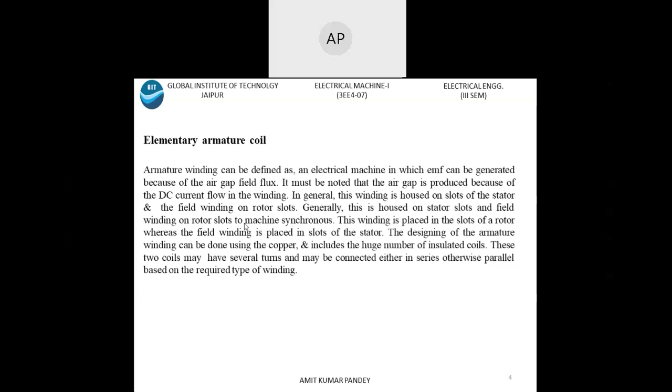Actually it is very important for commutation that armature conductors should be at the rotor, because if armature winding is not rotating, we are not able to find the working of the commutator, and it is the commutator which converts AC into DC. It is also known as mechanical rectifier, because we know rectifiers in electrical circuits convert AC into DC, and these commutators make AC into DC mechanically. That is the reason it is called a mechanical rectifier.

So for commutator, the commutator is pushed on the top of the shaft, as well as it is held on by a coarse knurl similar to the core. The designing of commutator can be done using copper bars, and an insulating material will separate the bars. Normally, this material is a thermoset plastic. However, in older armatures, sheet mica has been used.

The commutator has to be accurately associated with the core slots whenever pushed on the top of the shaft, because the wires from every coil will appear from the slots as well as attach with the commutator bars. To work the magnetic circuit efficiently, it is essential that the armature coil has a precise angular displacement from the commutator bar to which it is attached.

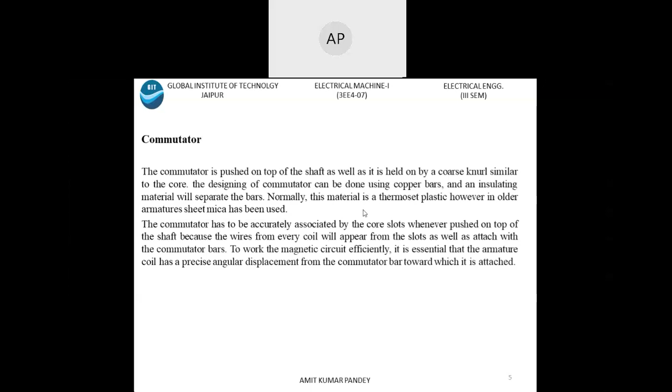So, in armature winding, there are two popular types of windings we use: lap winding and wave winding. In lap winding, the connection of the conductors is done in such a way that their parallel poles and lanes are similar. The last part of every armature coil can be connected to the nearby section on the commutator. The number of brushes in this winding can be similar to the number of parallel lanes, and these brushes are separated evenly into positive as well as negative polarity.

The applications of lap winding mainly include high current, low voltage machines. Lap windings are classified into two basic types: progressive and retrogressive. Here you can see from 1 it will start to another coil 2, and from 2 it will go to 3. So it is progressive.

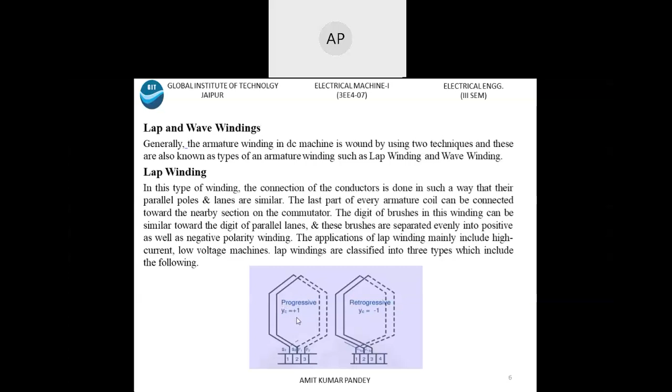From this side we can read, from 3 it starts flowing. Now from 3 it goes to 2, and from 2 it goes to 1. This is called retrogressive. And the commutation pitch is represented by YC. It is +1 in case of progressive, and it is -1 in case of retrogressive.

The three types of lap winding are simplex, duplex, and triplex. In simplex type lap winding, the ending of one coil is connected to the commutator section, and the beginning end of the secondary coil is arranged under a similar pole. Also, the number of parallel lanes is equal to the number of poles of the winding.

Next is the duplex type lap winding. In this type of winding, the number of parallel lanes among the poles is double the number of poles. The applications of lap winding mainly involve huge current applications. Such winding is obtained by arranging two same windings on the similar armature, and linking the even number commutator bars to the primary winding and the odd numbers to the secondary winding.

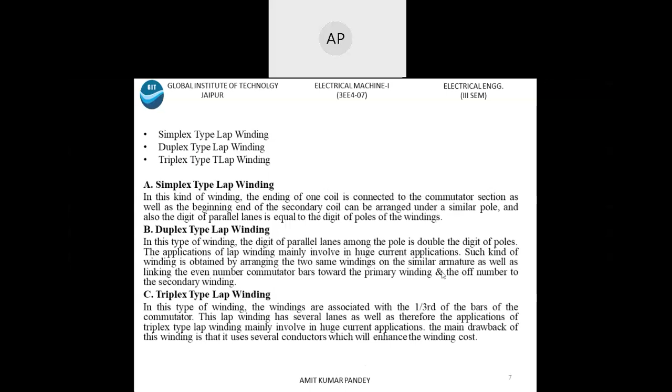The third type is triplex type lap winding. In this type of winding, the windings are associated with 1/3 of the bars of the commutator. This lap winding has several lanes, so the applications mainly involve huge current applications. The main drawback of this winding is that it uses several conductors, which enhances the winding cost. Obviously, when more conductors are used, the cost increases.

Now in case of wave winding, you will see that the commutator pitch changes a lot compared to lap winding, and there are a lot of constructional differences between these two types of winding.

In this kind of wave winding, there are only two parallel lanes among the positive and negative brushes. The final end of the first armature coil is linked with the beginning end of the second armature coil commutator segment at some distance. In this kind of winding, the conductors are associated with two parallel lanes of the machine poles, and the number of parallel paths is equivalent to the number of brushes.

This kind of winding is applicable for low current, high voltage machines.

We know that the formula for induced EMF in DC generators is Eg equals P phi Z N upon 60A, where A is the number of parallel paths. So in numericals, for lap winding A equals P, the number of poles, and for wave winding it is fixed that the number of parallel paths A equals 2.

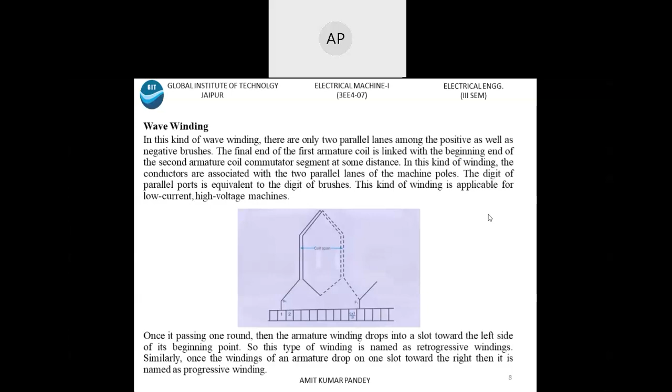If we see the construction of commutator, here it is given: a commutator consists of a set of copper segments fixed around part of the circumference of the rotating machine or rotor, and a set of spring-loaded brushes fixed to a stationary frame of the machine.

Two or more fixed brushes connect to the external circuit, either a source of current for a motor, or a load for a generator.

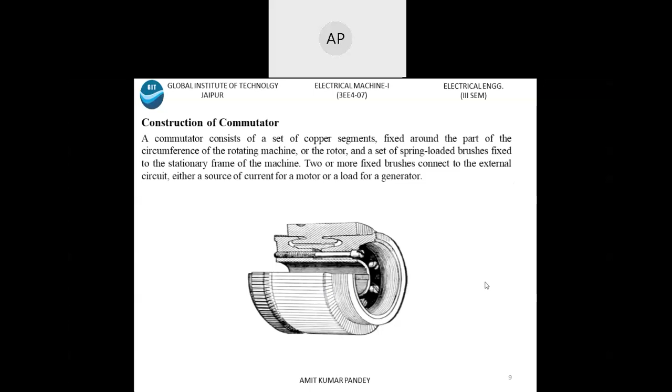Commutator segments are connected to the coils of the armature, with the number of coils and commutator segments depending on the speed and voltage of the machine. Large motors may have hundreds of segments. Each conducting segment of the commutator is insulated from adjacent segments.

Mica was used on early machines and is still used on large machines. Many other insulating materials are used to insulate smaller machines. Plastics allow quick manufacture of an insulator.

For example, the segments are held onto the shaft using a dovetail shape on the edges or underside of each segment. Insulating wedges around the perimeter of each segment are pressed so that the commutator maintains its mechanical stability throughout its normal operating range.

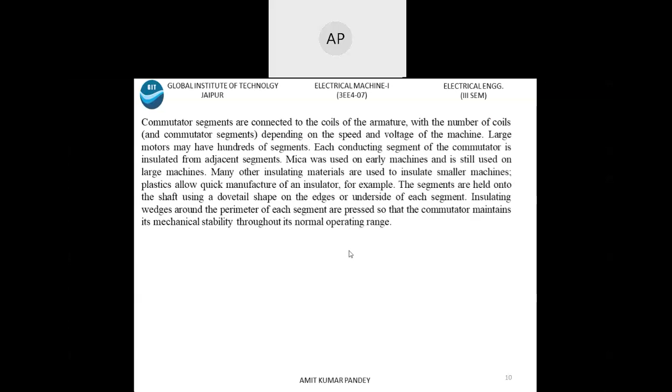Now we have the back EMF equation. When the armature of a DC motor rotates, the conductors also rotate in the magnetic field. According to Faraday's law of electromagnetic induction, EMF is induced in the conductors whose direction, as found by Fleming's right hand rule, is in opposition to the applied voltage. Because of its opposition direction, it is referred to as back EMF, EB. Obviously, V has to drive armature current against the opposition of EMF EB.

Actually, what happens is in DC generators and DC motors: in case of DC generator, there is a mechanical input, and what we get is electrical output. But there is a mechanical opposition there, and that mechanical opposition is called mechanical drag or pull.

In case of DC motor, we give input as an electrical quantity, electrical input, and output power is mechanical. But we get the electrical opposition, and that electrical opposition is back EMF.

Through the help of diagrams, we have seen how once a motor or generator starts, we can apply motor law in generators and generator law in motors. Once we try to understand these laws in respective generators and motors, we have seen that in case of motor, when we apply Fleming's right hand rule, we used to get back EMF polarity.

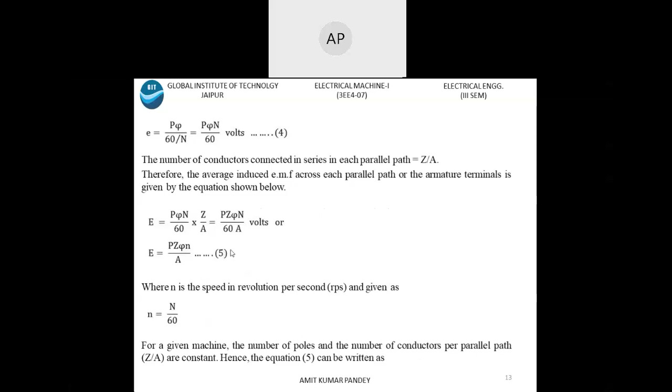For a given machine, the number of poles and the number of conductors per parallel path Z by A are constant. Hence, equation 5 can be written as E equals K phi n, where K is a constant given as K equals P Z upon A.

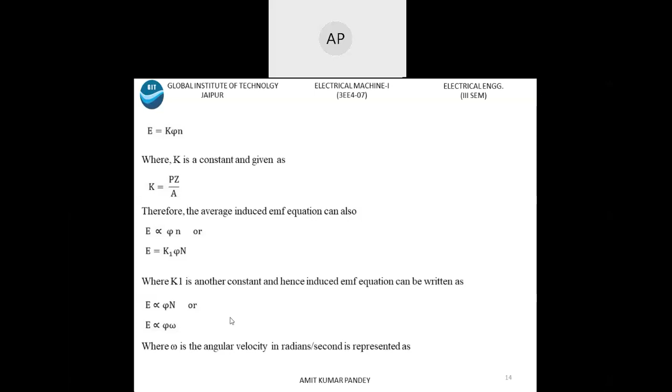Therefore, the average induced EMF equation can be written as E is directly proportional to phi n, or E equals K1 phi n, where K1 is another constant. Hence the induced EMF equation can be written as E is directly proportional to phi n, or E is directly proportional to phi omega, where omega is the angular velocity in radians per second, represented as omega equals 2 pi n upon 60.

Thus, it is clear that the induced EMF is directly proportional to the speed and flux per pole. The polarity of induced EMF depends upon the direction of magnetic field and the direction of rotation. If either of the two is reversed, the polarity changes. But if both are reversed, the polarity remains unchanged.

This induced EMF is a fundamental phenomenon for all DC machines, whether working as a generator or motor. If the DC machine is working as a generator, the induced EMF is given by E equals P phi Z n upon 60A, where P is the number of poles, Z is the number of conductors, phi is the flux per pole, n is speed in RPM, 60 is a constant value, and A is the number of parallel paths.

If the machine is working as a motor, the induced EMF or back EMF is given by EB equals P phi Zn upon 60A, and the same equation applies.